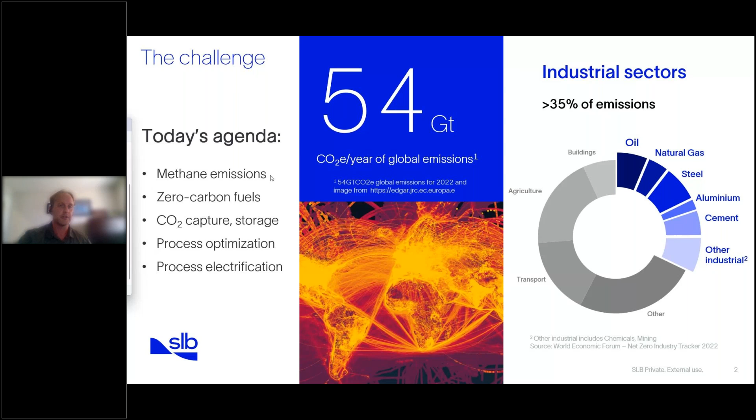Now, when we're thinking about building up the resources, building up the understanding, Eco Canada is one of the many public places that we'd see presentations such as the one I'm doing here today. But the bottom of the screen also shows a website link to efforts put together by IOGP. And similar in nature to the topics on the last slide, we can see here discussions on methane emission management within this website, reducing flaring, venting, and fugitives, energy operating efficiencies. And for each of these topics, there's guidelines, guidance, best practices, data sheets.

And we should take advantage of the public knowledge from these expert groups that are available to us today. At the same time, from this website, I like this waterfall plot showing the overall original emissions that we might be thinking about when we start our journey. From that point, the methane near zero, minimizing flaring, maximizing the process efficiencies and operational considerations. These are foundational improvements that can start the emission reductions.

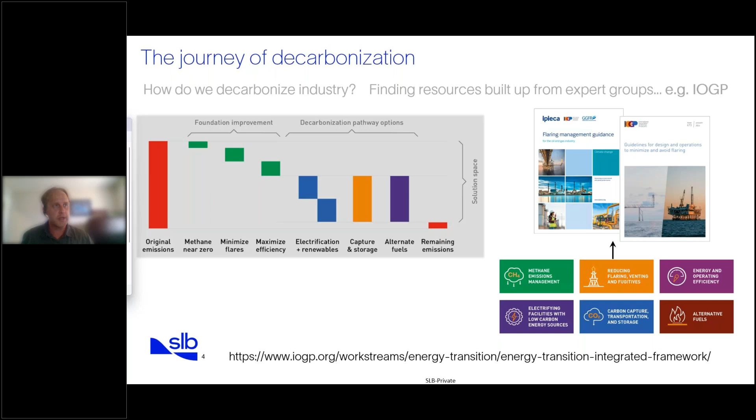Right, so really appreciate the voting there today. And again, I like seeing that process efficiency optimization, and we will be wrapping up today's conversation with those two topics, hopefully bringing in some considerations that maybe you haven't seen before, maybe some that can just reinforce what you're doing today.

So when it comes to those different topics of decarbonization, when we look at the company that I'm coming from, SLB, formerly Schlumberger, and we look at the global decarbonization projects that we've been involved with over the last couple of years and throughout our history, one of the things that we can definitely tell, above the fact that there's a lot of different activities occurring, is that there is a larger contribution from specific types of decarbonization depending on the region globally. So in the North American market, we can see there's a lot of carbon capture, utilization, sequestration. In other areas, we can see the low carbon solutions are pushing through emission reduction type projects.

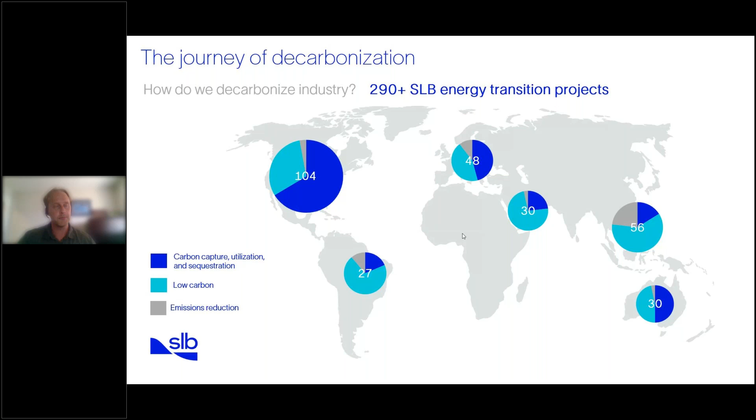And what really I wanted to say to this talking point is that different global regions have different benefits from looking at different decarbonization solutions. So you can't give that overall blanket of a silver bullet when it comes to what you should do behind decarbonization. But here in Canada, of course, we do have some natural resources, some geology, the different types of labor costs, the utility availability and stuff that will all lead towards what might work better in our region versus others.

So the first topic I want to touch on today was actually one that was shown of least interest to the crowd. So maybe this is a good conversation to bring up and bring awareness towards, which is the methane emissions. So when we think about methane emissions and how much that contributes to the overall CO2 equivalent, we can see here one of the plots pulled from a couple of years ago where we can see the direct scope 1 contributions of just methane towards the overall carbon dioxide footprint.

Scope 1, just as a definition, is the direct process emissions. Whenever we're talking Scope 2 within this presentation, that's looking at the utilities such as power consumption that's related to the emissions. And then Scope 3 is a much harder to measure and calculate emission footprint, which is the emissions brought through the suppliers or the generation of the materials required for the solutions.

So one of the things right here in this upper pie graph is we can see the methane contribution towards the overall CO2 equivalent footprint is very large. When we break that down further, we can see that at least for onshore methane emission sources, there's the cities, pipelines and stations, gas plants, there's the gathering and boosting stations, as well as the well pads. There's a lot of different sources of the methane, and they come in different types of causes, where it's fugitive, it's planned, safety, blowdowns, etc.

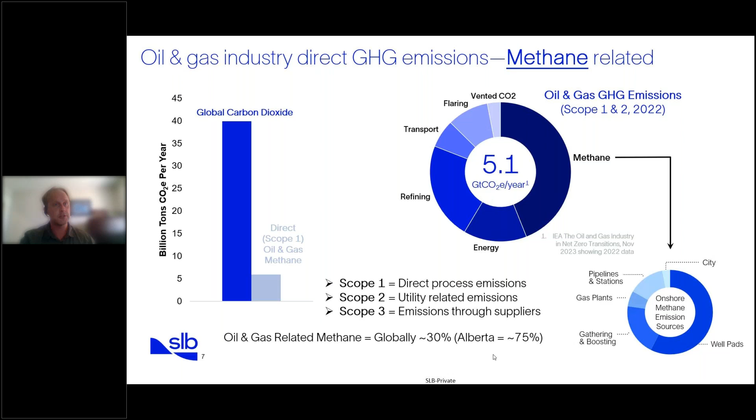And one of the things I also wanted to mention in this opening slide for methane is that oil and gas specifically, so not talking about agriculture, landfill type emissions, but we're talking about the oil and gas sector. Globally, it's typically considered around 30%. When it comes to Alberta, though, because of the large activity in the oil and gas sector, there are some numbers that push it as far as 75% of the methane is coming from the oil and gas sector. So again, it shows a good opportunity to reduce and even make some monetization along the way.

So thinking about what are we doing here in Canada? What are we doing in Alberta in a region with more activity? This is just some of the things that I collected very easily. So one of the things that I'd mention right away is that there's a lot of different pressures trying to minimize or abate methane within the industry. So we have the corporate commitments, so the companies that are choosing to become low emission type organizations. We have the investor pressure, of course, coming through, loss prevention, so literally just not wanting to lose that natural gas that could be brought to the market for sales.

We have certified gas that's coming up more and more around the world globally. And we have the non-government organizations, which do the name and shame these days. They say, look how much you're flaring, look how much you're emitting, and they try and put pressure on the companies. And of course, there's government regulations. When it comes to directives, such as Directive 60, kind of summarized here, we're looking at, can we actually eliminate the flares? Can we eliminate the vents? And we also see ramping up the global pressure. There's already 38 stock exchanges with ESG as a listing rule.

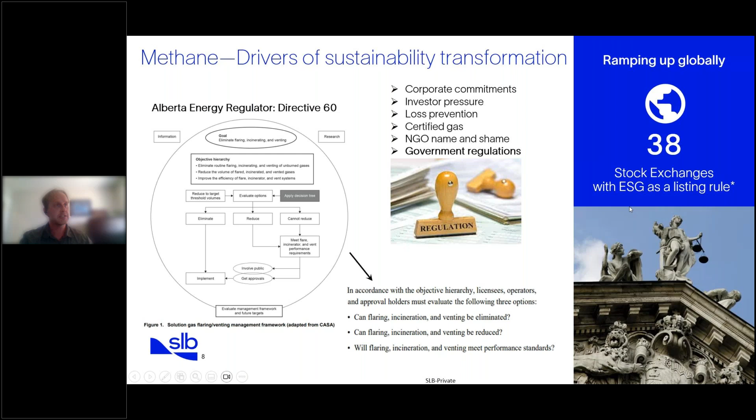On top of that, we also are looking at sustainability reporting standards. So there's one scheduled at the beginning of 2025. It's currently voluntary, but Canadian regulators are deciding if it will become mandatory. At the same time, there's proposed regulatory framework to try and achieve some of the goals of oil and gas methane specific emissions by 2030.

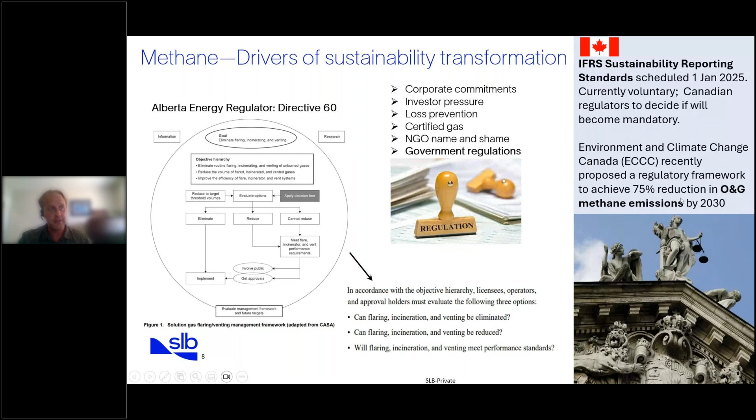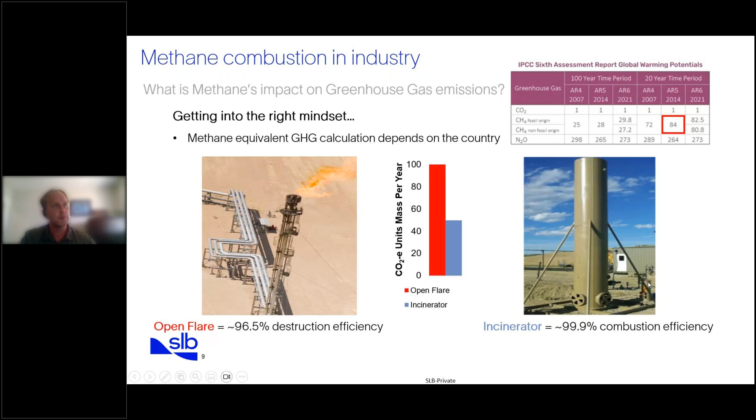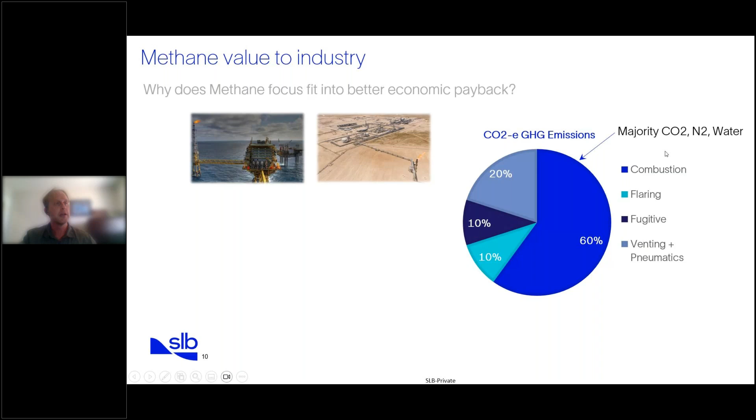With that mindset, we also want to say why focus on methane, especially at the beginning of the decarbonization journey many companies are doing. One reason is when we look at the CO2 equivalent GHG emissions in the upstream, we see a typical asset will change depending on location and equipment, but usually there's a large contribution from combustion type equipment. There's also flaring, fugitive emissions, venting and pneumatics. In the case of combustion, once you've created power or absorbed heating sources of energy, you're mostly looking at a mixture of CO2, nitrogen, and water.

But venting and flaring may be more difficult to collect with fugitives. We do have a majority of methane or hydrocarbon content fluid in this case, which can point towards good techno-economic opportunities. This could be found through gas recovery into the sales lines, gas recovery back into the feed or the suction of a compressor pump back to the front end of a facility where it can be processed into sales material, and it could also be converted into product value such as heating, power, or chemicals.

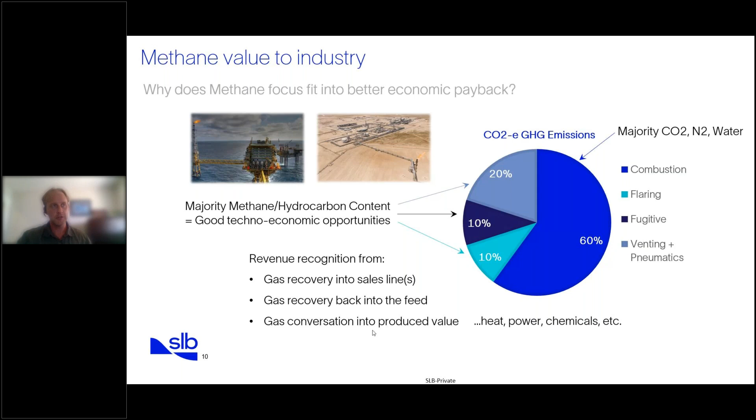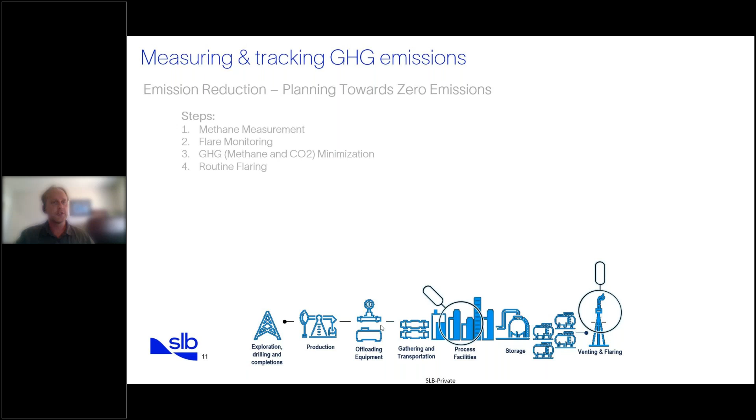When we think of the journey of measuring and tracking GHG emissions specific to methane, there are specific steps we usually recommend. For zero emissions, first you should have a good measurement program. This would include top-down measurements such as satellites, drones, and planes, as well as closer point sensors like OGI cameras you might find on the ground. We also have flare monitoring—how much hydrocarbon slip, what destruction or combustion efficiency, and what volumes you're seeing from each flaring point.

Those all collected together point towards voluntary programs like OGMP, which look at tracking those types of emissions. That's a good starting point to understand what you're dealing with before moving to the third step, minimization. From the audience polling results today, we can see this minimization or optimization of your process and facilities to reduce emissions is a step you should do before going into extra activities like monetization of the resulting emissions from vents or flares.

So if you start by looking at how to monetize vented or flared gas, finding, sizing, and deploying solutions in the field, and only then go to minimizing and optimizing emissions from your facilities, you're going to find that you've over-designed those solutions. This is typically the progression you want to follow.

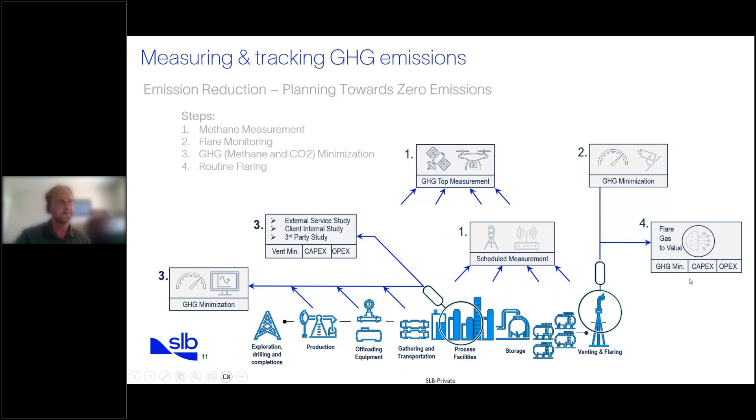Ejectors and eductors are mostly stationary units. What they do is use a motive fluid, whether gas or liquid, at a higher pressure, and it creates suction as it passes through the unit, drawing in the gas to be recovered, boosting its pressure, and pushing it further along within the facility or to a point of value or market.

When we think of these types of systems, one thing we should consider is that they have to be fail-safe. In other words, when these systems go down, as they might and they would, we still need to make sure we're properly combusting those fluids and not just venting them to the atmosphere, going back to the emission impact of not combusting things properly.

You also want to make sure when you're going through these recovery systems that you do that third step before the fourth, which is optimizing the facility process operations itself. One example would be reducing the oscillatory behavior in your plant as much as possible.

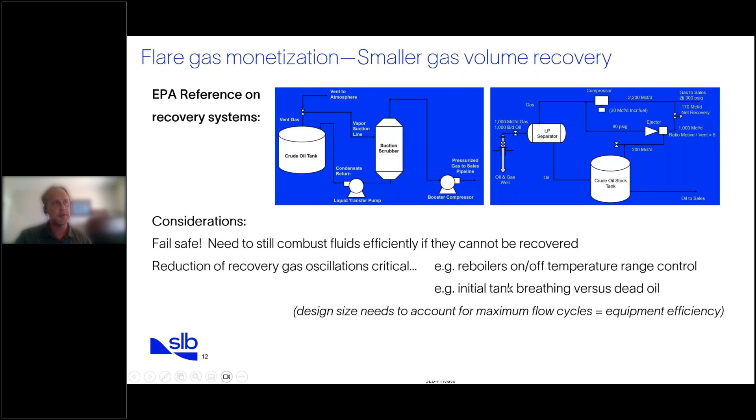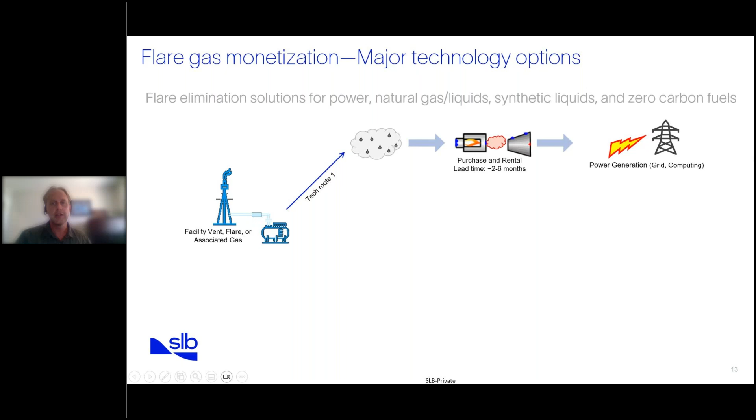When you get to larger solutions and you start looking at a quarter or half million standard cubic feet per day type situations, you do have different options, not only of what you're going to bring as value to the market or to yourselves in your own operation, but also to the different lead times and business opportunities.

So in this case, we can look at power generation. A lot of companies I've talked to globally say power is king. If you're otherwise wasting the flared or vented gas, why not run it through a purchased or rental type solution, generate power at site, potentially even bringing it to the grid, even though there are challenges depending on the size of the project. Typically we're looking at lead times of a couple of months to half a year.

When we're looking at a second technology route, mainly purchasing equipment that can compress or liquefy the otherwise flared or vented gas, dropping out condensates as well, or the LPG, we can then ship that to a point of use, utilization, or sales to the market. These types of equipment usually have lead times of half a year to a year, and again you're typically going away from the rental or lease options and going towards purchase.

The third technology route that we're looking at is potentially converting it to a synthetic liquid, such as synthetic crude, gasoline, diesel, or even synthetic methanol. These technologies are not as mature as the first two, but there are facilities and technology companies that have been running for years now across the world. They have thousands, tens of thousands of hours of operation, and very solid design specs at micro levels.

Unfortunately though, when we're getting to this size, the lead times can easily be 1 to 2 years. The reason I'm mentioning the lead times is when we think of 1 or 2 years of lead time for one solution, we're thinking of where we are here today towards the second half of 2024, and we're thinking of the goals of 2030. We can now start seeing that lead times and the scale up that we require might be an important part of when we need to start some of these efforts.

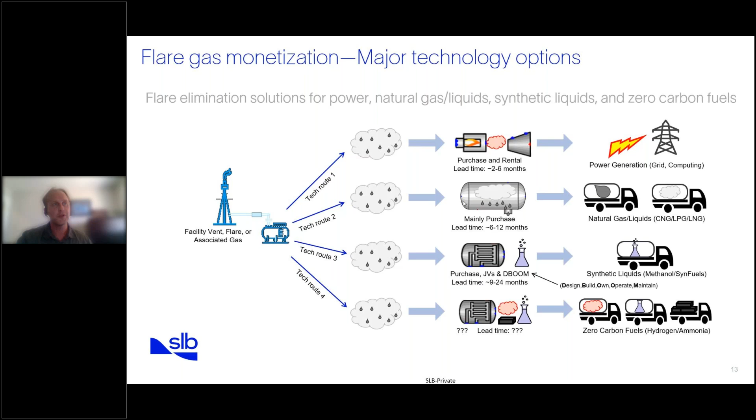Moving into the market space these days, we also see computing type solutions, and some of these top solutions also going into gas purchase agreements. Some companies will come in and make an agreement where they will purchase your otherwise flared associated gas off of you. And then they will take not only the gas, but they will also take your emission footprint. But of course, they're also going to take the value to market that they create. So again, a lot of flexibility in these things.

But one of the things that we do internally as a company, that we always recommend to any company that's moving into this space, is that you build a rigorous thermodynamic validation of the different solutions.

The vendors, the technology providers, will always say their solution is excellent for what you need today. A lot of companies actually come to us and say they don't know which one to pick, specifically because their flare or venting opportunities, the volumes, compositions, and delivery pressure will all make an impact on the techno-economics of these types of solutions.

So internally, if we pick one of these types of solutions, say liquid fuels through a conversion technology, we will actually build out the technology solution within a thermodynamic environment. We make sure that it's modeled to multiple points of feed composition, and then we'll have a better understanding of the emission reduction footprint.

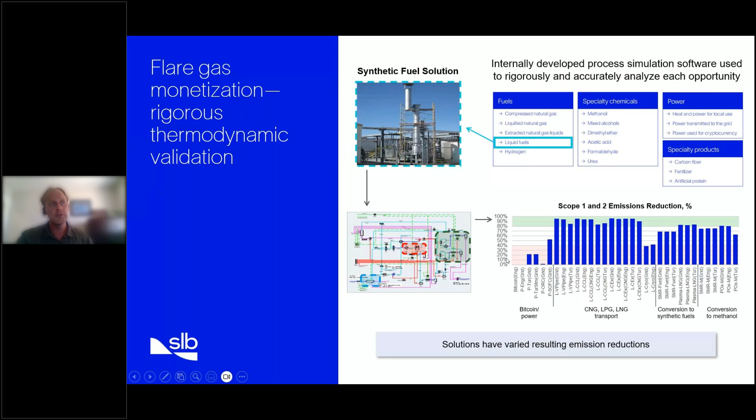Unfortunately, a lot of computing and power generation uses what would have otherwise been wasted, flared, or vented gases for emissions. But in the total holistic story, you're still not reducing emissions. You're still putting the CO2 into your field.

Some of the other solutions, you might say, well if you create synthetic fuels or synthetic methanol, you're going to burn it anyway. It's not always the case. For synthetic methanol, as an example, you might use it as an antifreeze or an inhibitor, especially up in Canada in the northern regions where things might get cold.

You could ask yourself, how much are you paying for methanol today? And this would be higher grade methanol from the market. Can you offset that cost by creating synthetic methanol in your field today? So you're even removing the inventory costs.

At the same time, some of the synthetic fuel liquids can go to lubricants because they're very paraffinic in nature, which comes naturally from the synthetic process and the catalysts. It might also be used as feedstock in steam cracking plants, creating ethylene, and then downstream to vinyl chloride monomer type plants, being turned into recyclable plastic.

So again, some of these solutions are leading towards non-combustive and non-emission creating results, and those are things you might want to be aware of.

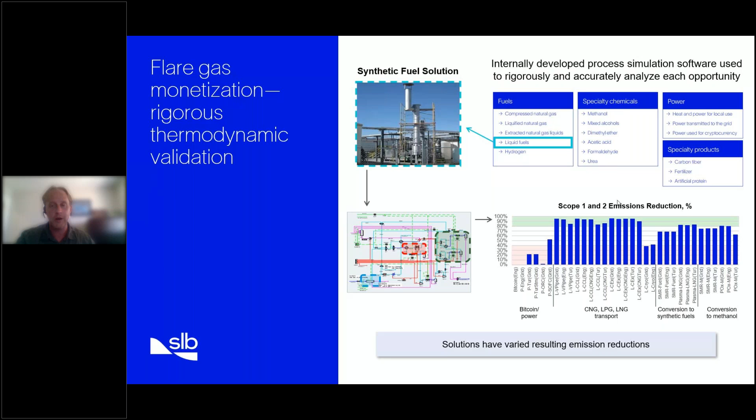The other thing we want to think about, not only with these types of solutions but also some of the carbon capture micro solutions I'll talk about soon, is that micro scale brings different economic considerations. The equipment, as it gets smaller, does not typically scale well with economics. So you're going to be paying more per unit of production or feed gas coming in. You also have the disadvantage that instrumentation and control systems don't scale down in cost as well as everything else.

So you have to take into consideration that some of these solutions have a minimum volume where economics make sense. You also have to make sure each technology doesn't come with an unreasonable utility consideration, whether that's logistics, safety, or cost. So if something needs a lot of power generation, and that power generation is created by something emission heavy, that probably won't be a good solution.

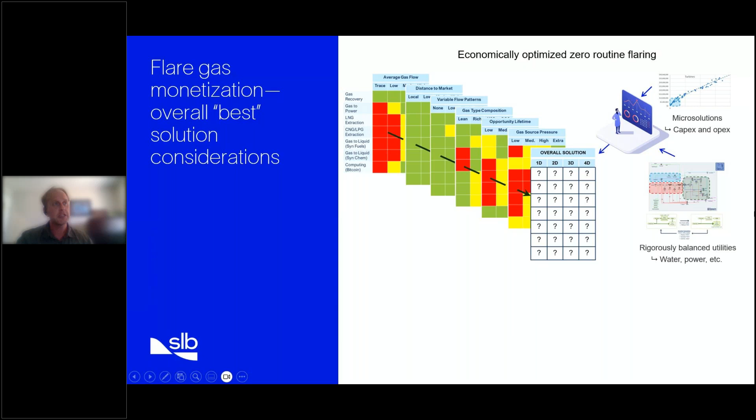If you need a lot of potable water in an area that is water restrictive, again, probably not the best solution. But these rigorous models and studies that we complete internally help us make sure we're not picking the wrong solution, and more to the point, that with a holistic integrated solution where we might generate our own power, clean our own water, or remove potentially harmful content in the front end through treatment, we find what we'd consider the diamond in the rough.

Is there one particular technology that can go through the average gas flows, the distance to market, the variable flow patterns of the source gas, and even the delivery source pressure, etc.—go through all the parameters that might impact the overall economics and find the solutions best to move forward?

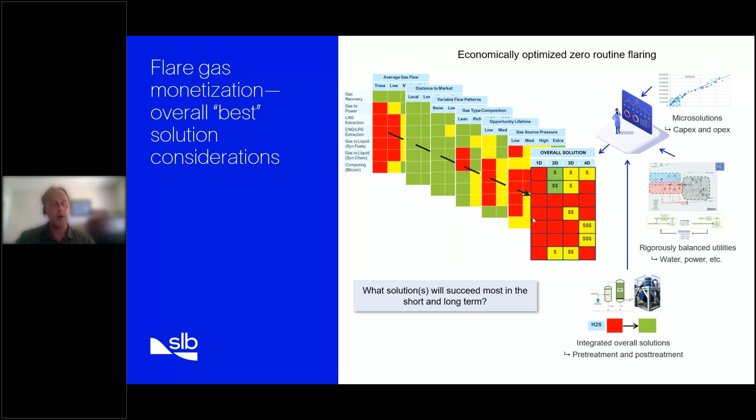And this is not just in the short term, but we're also looking at long-term solutions. Some of these will probably become more apparent as we talk about the electrification side of things later on.

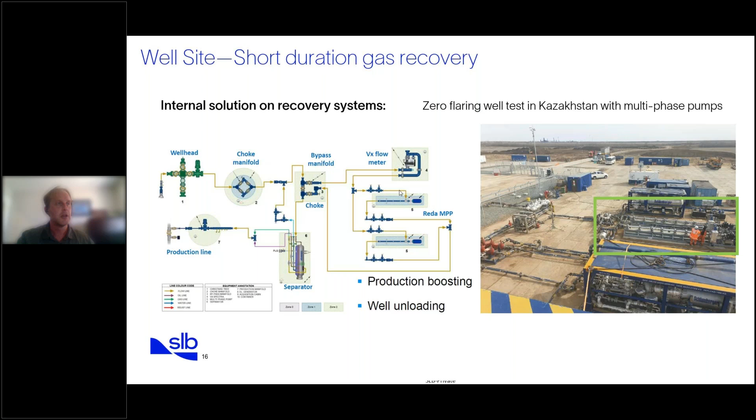Within cleanups or some of the well testing considerations.

The other thing I wanted to mention is that within our company, we are now looking at always using low emission valves, and of course we're also selling this to industry. About 95% of our valve portfolio is covered with low emission valves. This is not always as easily done on brownfield applications, but for greenfield applications, we're always making sure these are the valves we try to implement.

Of course, you want to make sure they're also okay in applications of new fuels that are coming through. We also want to make sure all of these are good for aftermarket services and repairs at low cost.

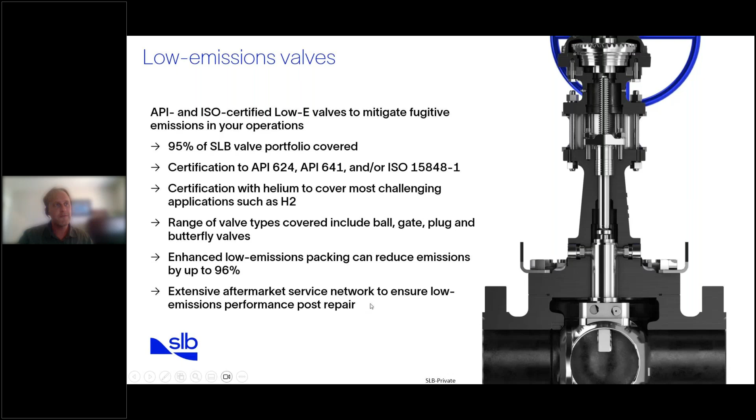But when we think about low emission valves and where they fit into the emission space, we can think about pneumatic control considerations overall. High bleed pneumatic controllers — we can look at how much emission impact they have versus low bleed or no bleed type considerations. There's already a magnitude of impact with this consideration, but we can take it one step further and also look at air compression considerations.

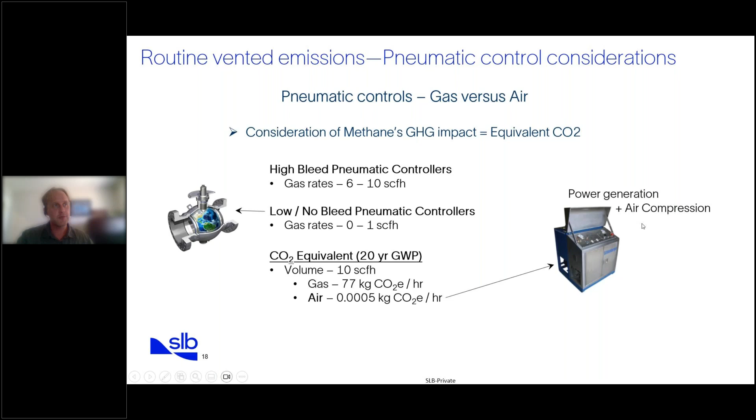One of the things we've also looked at with decarbonization is whether we can use some of the otherwise pneumatic vented gas. We can use it to combust for energy, compress air, and run air through the system instead of just venting it. In those situations, power generation and how that's done becomes extremely important.

One thing I'd like to mention is that a lot of the good solutions we've found in industry globally use something like a Stirling engine. Stirling engines are very robust and have good lasting power. A lot of times I've heard stories of hurricanes going through the US.

When they're looking at power sources that are still showing up on the grid, there are a couple of locations running the pneumatic controls in facilities in the oil and gas industry, and they are using those Stirling engine air compressor solutions. So again, these are some of the considerations to go from the older higher bleed valves, to low or no bleed valves, and then to air compression.

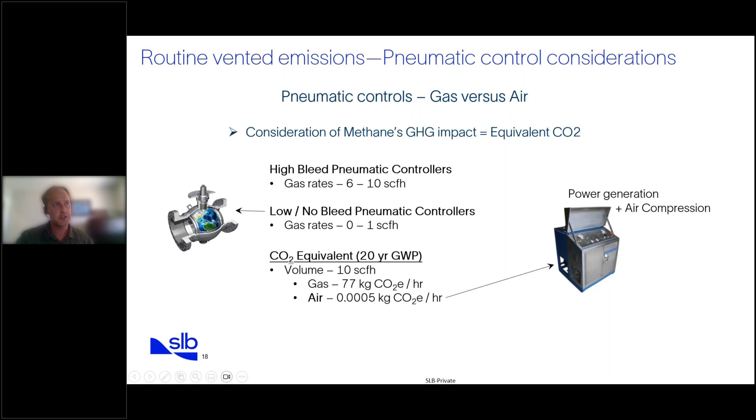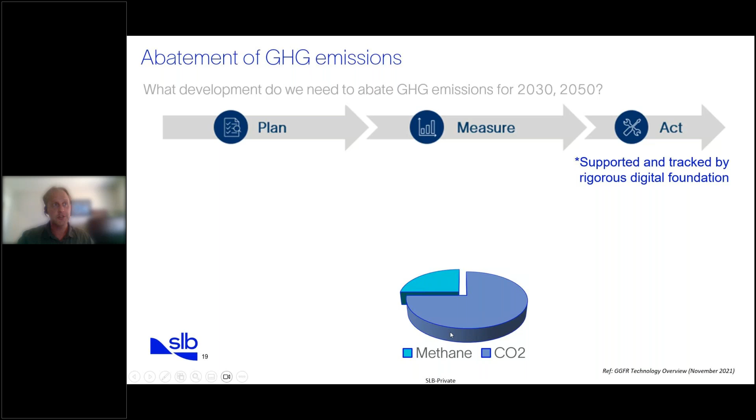Taking a step back now that I'm done with the methane section, we want to think about how we're going to abate those GHG emissions for the 2030 and 2050 goals. We're planning, measuring, acting on those solutions and the data we've gathered, and supporting and tracking it through a rigorous digital foundation to make sure we're doing things well. But when we think about overall GHG emissions, we have our piece of the puzzle that's methane, but a very large piece that's CO2.

For methane, I've gone through some of those solutions, but now I'd like to shift focus and go to what we can look at for CO2 related to post-combustion capture, direct air capture, or even zero carbon fuels. But before I go to the next section, I'd like to bring up a second polling question.

I loved the activity and enthusiasm on the first polling, so I hope you all have the same for this one. It's about finding a balance between production increase and a commitment to climate change. We all know this is critical, but what would be the top choice on where you are today? Would it be monetizing all your product and getting that revenue stream? Just worried about eliminating emissions, whether that has cost or not? Or do you want to look at both — reduce emissions but make sure you're making money at the same time, so it can compete internally against more production type situations?

So far with the results, I love what I'm seeing. I've seen this poll taken in many different areas of the world. Being here in Calgary myself, and being Calgary based and Canadian based, I'm really happy to see that everything is either just eliminating your emissions, or eliminating your emissions with the awareness of trying to make sure it makes sense from an economic point of view.

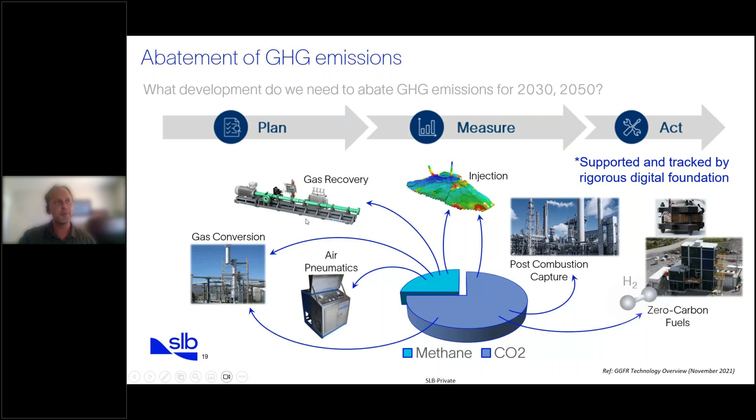These next topics are a little bit more challenging. So when it comes to zero carbon fuels, one of the things that I keep mentioning is the location.

When it comes to blue hydrogen, we can imagine that cheap natural gas as a feedstock is one of the important factors behind having the right economics. One other thing I can mention is that around this area, we also have good underground subsurface storage opportunities. So those two put together—knowing that blue hydrogen comes with CO2 storage or utilization, but then the green hydrogen side of things with electrification or electrolysis stacks—we also have an opportunity of low renewable prices in our area. So both of these can make sense.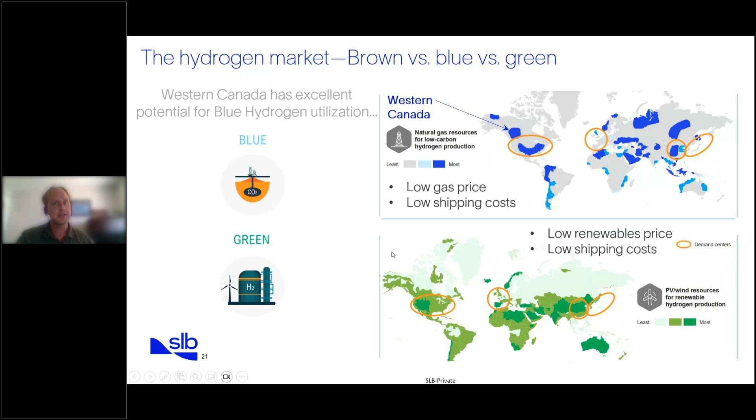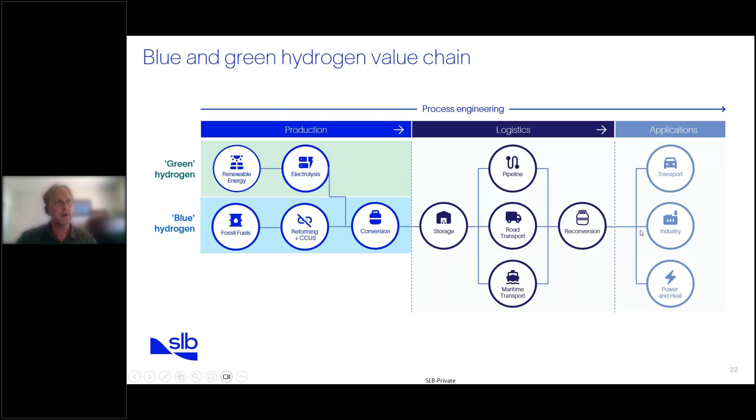One example I'll show on that. With this storyline, one of the things we want to do internally is something very similar to what we did with the methane story. We want to start with accurate thermodynamics, go into a flexible workspace where we understand reactive and separation units. We also want to make sure we see the economic impacts, especially with the major equipment we're going to be looking at, and of course the metallurgy.

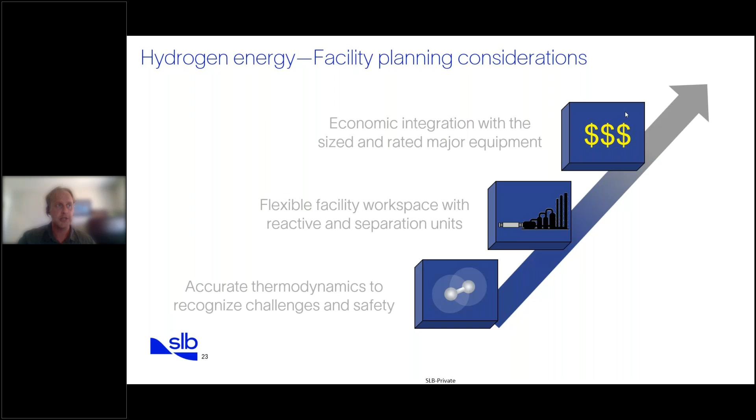Hydrogen brings different metallurgical considerations. With hydrogen-induced cracking, we want to make sure the metallurgy is well done and the associated costs are considered. But as an example of looking at the thermodynamics and the type of equipment or process involved, we can think about natural gas reforming or electrolysis to hydrogen.

We're going to compress it, store it, and dispense it to hydrogen vehicles on the road. So one of the things we can ask is how much cooling is needed in the dynamic depressurization. Another question is what natural gas city infrastructure can be used with hydrogen, or reused.

But when we think about the overall process side of things, we also want to make sure we can handle the peak rates. So when handling peak rates, we can think of the storage capacity, how many dispensers or stations we need within certain regions of population, and then the thermodynamics kick in.

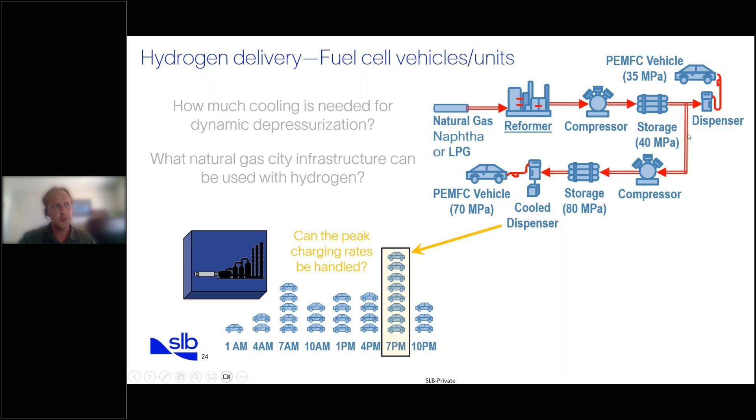I don't want to go through too much thermodynamics given the time limitation today, but one thing I do want to mention is that hydrogen is known to have an inverse Joule-Thomson effect. For natural gas, when you drop the pressure at high temperatures, you get a cooling effect. Hydrogen does the opposite—it'll actually increase in temperature.

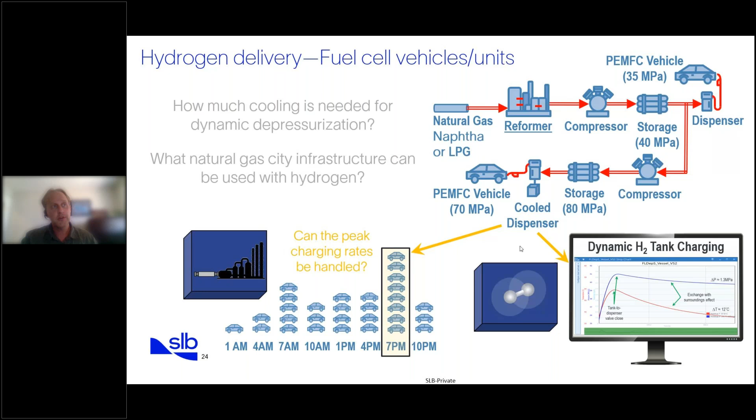Knowing these unique thermodynamic considerations of hydrogen, you now have to look at how much cooling you need depending on the speed of dispensing, and also how much pressure drop you're bringing through the system. These are the types of things that rigorous thermodynamics will help you understand—what those solutions will look like, different from what we're used to on the natural gas or hydrocarbon side of things.

When we think about the overall economics, we need to now go through different scenarios.

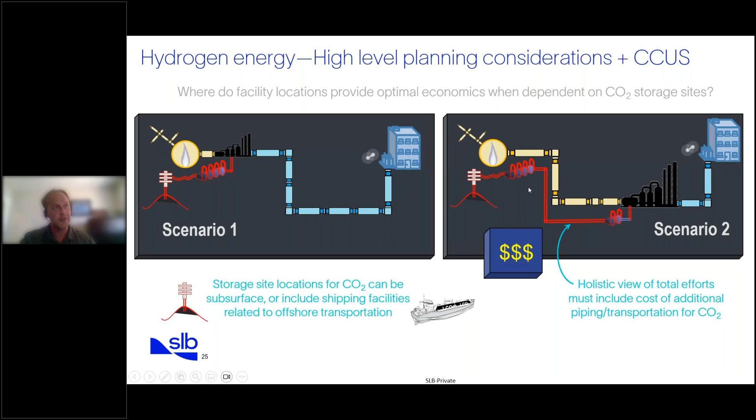Do we want a scenario where we have storage sites for CO2 that are very close to the hydrogen production and therefore also the CO2 production? Can we include the shipping facilities, the location and subsurface where it's going to be stored close by? And we can compare that to doing something where the hydrogen is going to be produced close to the site of utilization, and the CO2 is the one that's going to be taking the long trip back to where it's going to be stored or utilized itself.

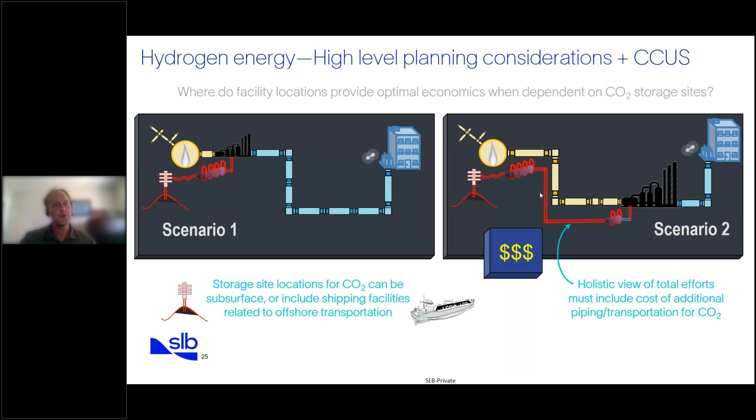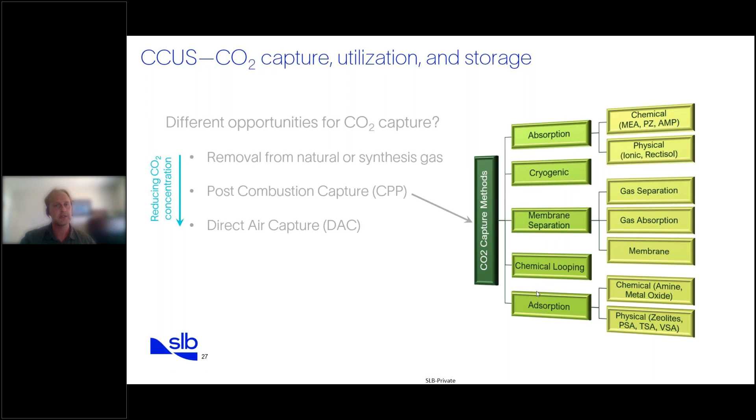I just want to pick on some of the more focal points that I found through my journeys, one of them being the composition. Of course, you also have to consider where you're going to use this CO2 and whether it's being used for the beverage or food, and you need stain removal, odor removal type applications as well within your process, or you're going for the medical and industrial, or you're just going for storage underground, or maybe secondary or tertiary recovery situations in a reservoir. All of it requires different purity. That purity can be done by the different solutions, some of them mentioned here, and this is now looking at where CO2 concentration in the initial gas starts playing better with the process considerations and logistics of different technologies.

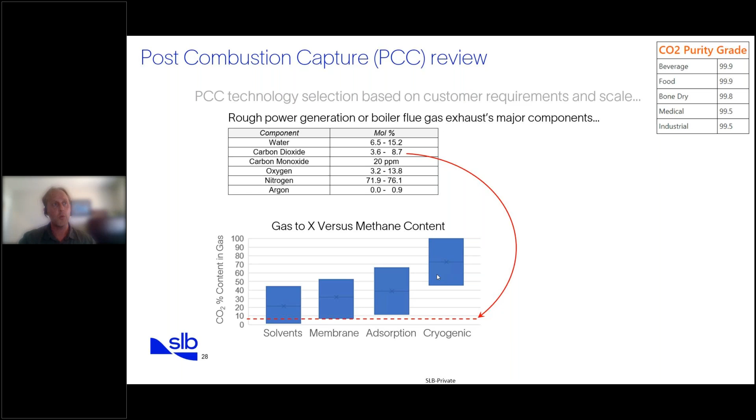So a lot of times I've talked to companies that say, hey, we have a boiler, we're looking at 3 to 8% CO2 composition. Could we start looking at cryogenic situations? Yes, you can, but probably you don't want to. And maybe what you need to consider is membrane separation or solvent separation, maybe not to get to your final composition that you need for your utilization or your storage, but maybe to get you partway there, where then that process starts making sense.

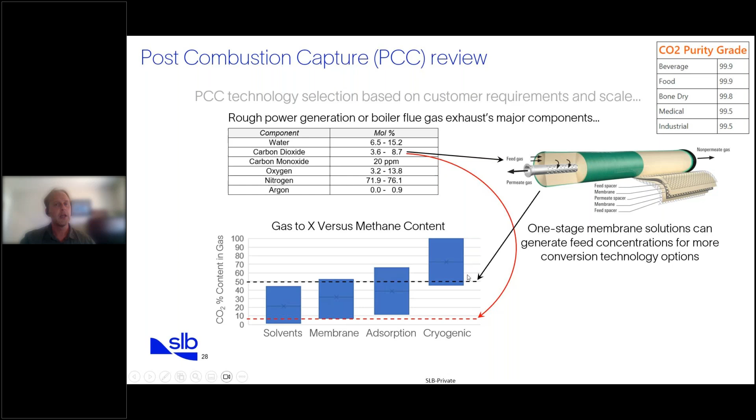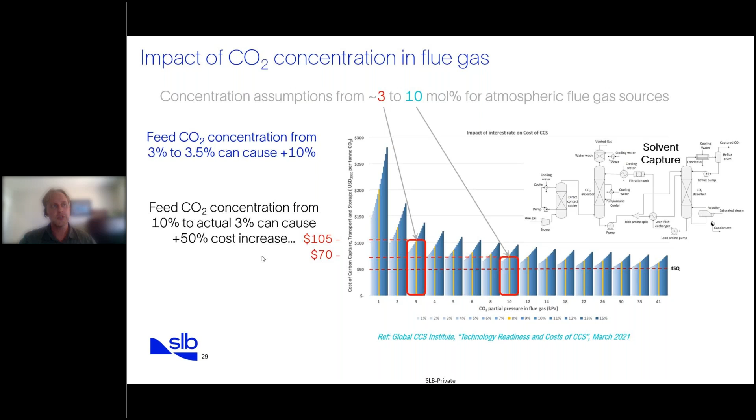So the CO2, if you can just boost it just from leaning out the oxidant going into a burner system from 3 to 3.5%, you can actually reduce the economics of your carbon capture solution by 10%. Going from 3 to 10%, maybe it's a different type of combustion system that you require. That's maybe $500,000, but it can save up to 50% of the combustion capture cost. Maybe that's double that price. So a lot of the considerations are always what type of sources and partial pressure of CO2 are you starting with?

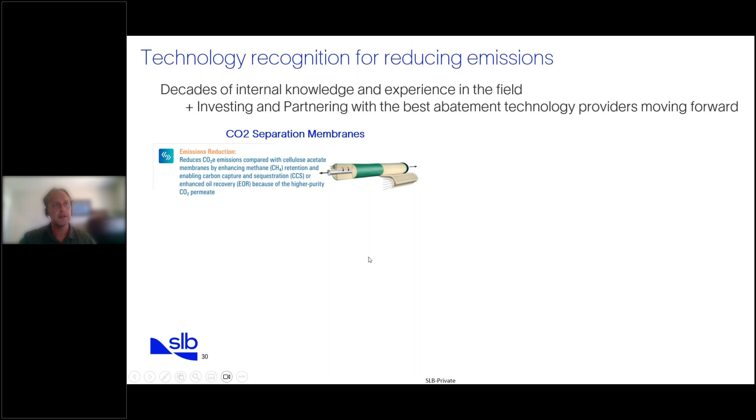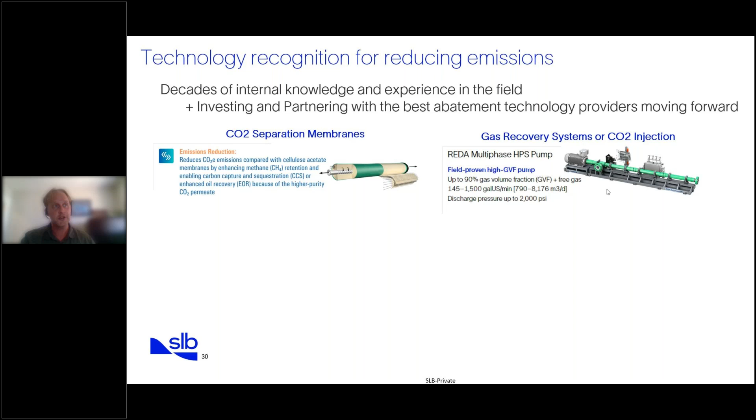When we're looking at what solutions we've adapted within our company, our partnerships, our investments, I just wanted to mention a couple of them here today, just to make the awareness of what's out there maturity-wise in industry. So we have the membranes that we were talking about earlier. We also have multi-phase pumps that can be used. I was mentioning before for the methane or the hydrocarbons, pushing them away from flaring, but it can also be used for CO2 injection.

We have an investment in ZEG, which is a company that does hydrogen as well as a unique way of CO2 separation for storage. And also with the post-combustion capture, we've looked at non-aqueous companies, which have advantages specific to the energy requirement of regeneration and also the amount of pressure you can get as the CO2 releases out of the system for then taking away from the post-compression requirements. So these are just some of the mentions on what we are looking at investing in and moving towards decarbonization.

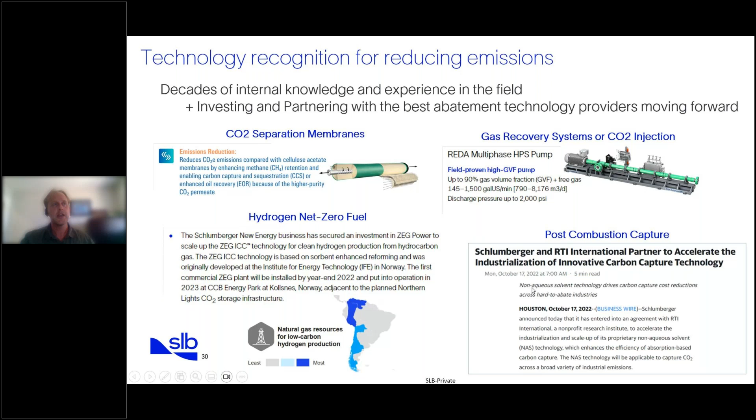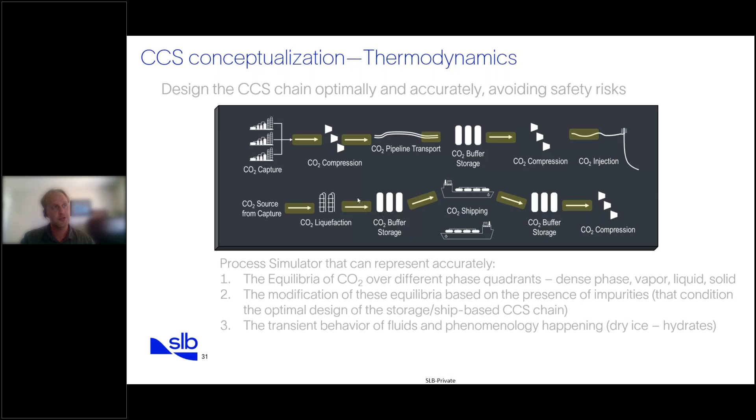I'm going to move pretty quickly here just for the means of time, but what I wanted to talk about with CCS or the CO2 side: thermodynamics, just like the hydrogen and everything else, is extremely important. Start with a good foundation, understand how small amounts of impurities change the impact on how you need to pressurize this for storage and where those boundary conditions lie.

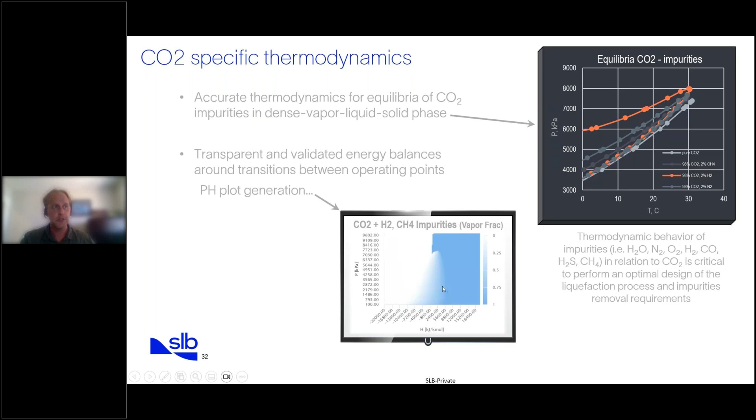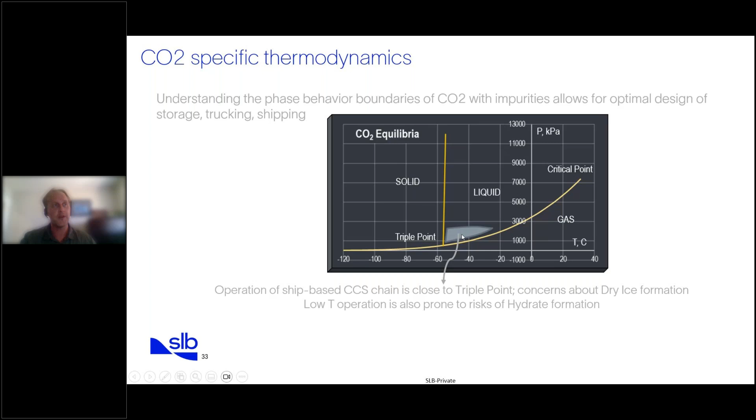Sometimes you can save a lot of money by doing a little bit of purification upstream. You don't need so much compression downstream. Understanding the energy requirements also comes from a good thermodynamic understanding, and also the storage. Where are those triple points? Where is the liquefaction? If you're going to store this and ship it, and you're going to have a specific heat loss, what do you need as a safety factor to keep it in the right phase for the transportation?

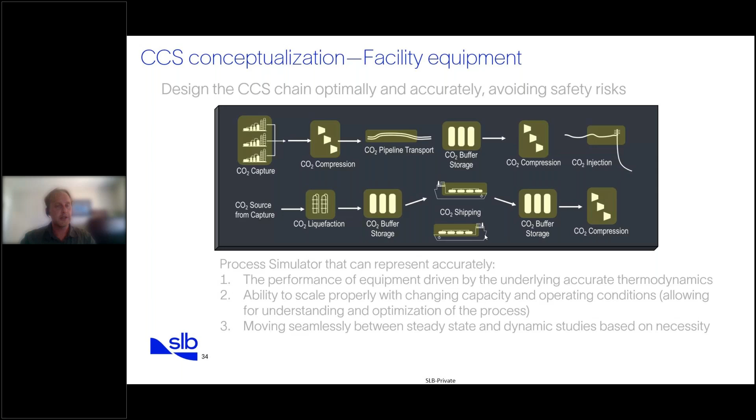At the same time, with that foundation of thermodynamics, similar to the other stories of zero carbon fuels, you're going to be looking towards transporting and using equipment to store it and separate it. This is just a couple of the mentions of work we've done. Back in 2006, we were already looking at how the thermodynamics impacted how much you can compress and how much you can interstage cool different acid gas considerations.

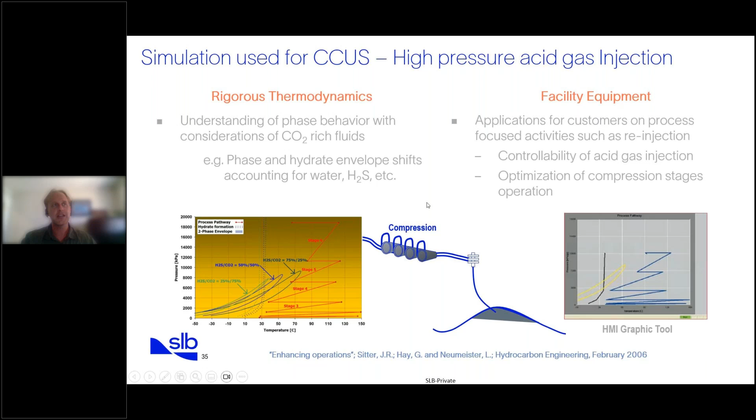And in cases of enough H2S, you can actually undersaturate the gases, removing the dehydration plant section; you can undersaturate the gases specifically. When there's too much CO2 content, it doesn't work as well, but with even mixtures or close to even mixtures for the acid gas, you can work into these types of considerations and completely remove facilities.

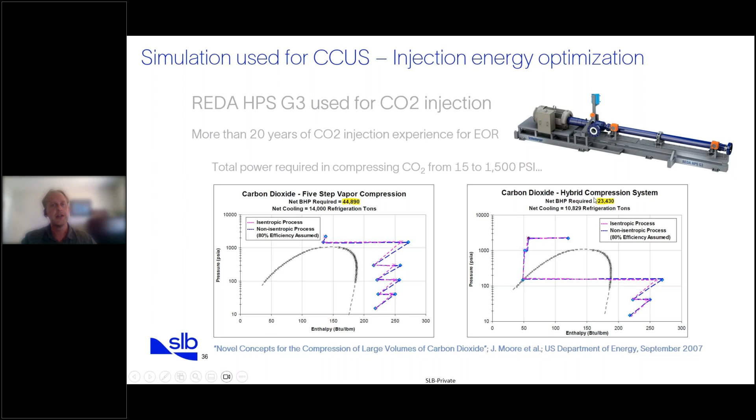There's also the idea of using the equipment along with those thermodynamic understandings to help decrease the amount of energy you need. In this case, going away from just the vapor phase compression, using multi-stage and multi-phase compression, going into the liquid side. Again, lesser volumes, compression, saving energy, saving money. These types of considerations and the references below, I just wanted to share here today.

So the last topic, which seemed to be the one that a lot of people are interested in here, process optimization and electrification. Some of the optimization is quite straightforward and simple, moving back to some of the topics we've already talked about. So multi-phase pumps: instead of doing a lot of individual wells with separation and flaring and metering at each, you can use validated three-phase metering devices, use the multiphase pumps and push these towards bulk separation where you can get larger amounts of gas and start monetizing at better scaled economics.

So again, going back to some of the slides that we were talking about before with the conversion or the LNG, CNG power generation. At the same time, you can also do some of the steps in increasing the partial pressure of CO2 in your exhaust gas to reduce the costs of your CO2 post-combustion capture. So this is almost the optimization in your process leading to some of those earlier solutions.

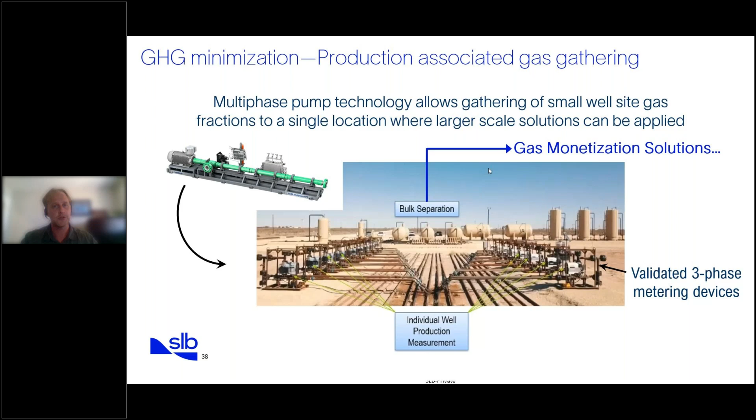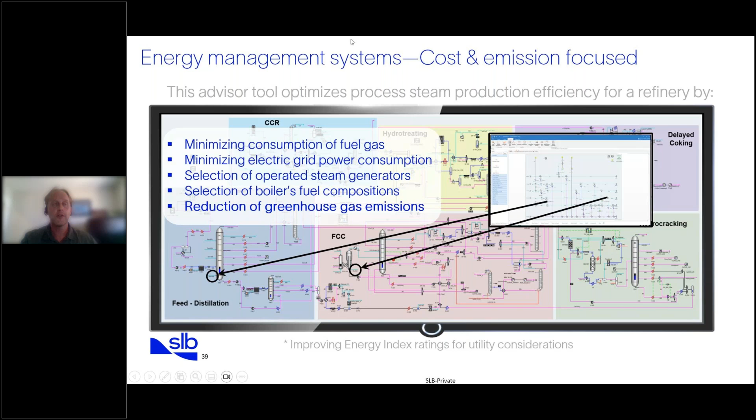At the same time, you can do energy management systems. So we can look at some of the tools that we're deploying globally, such as minimizing the utility like steam consumption within, in this case, a full-fledged refinery. We've also looked at petrochemical plants. And in these considerations, we look at all the different production of steam from the different boiler systems. A lot of times there's multiple boilers and different types of fuels for each of the boilers. So whether it's cogeneration or just steam generation, we'll look at each of the individual sources of steam.

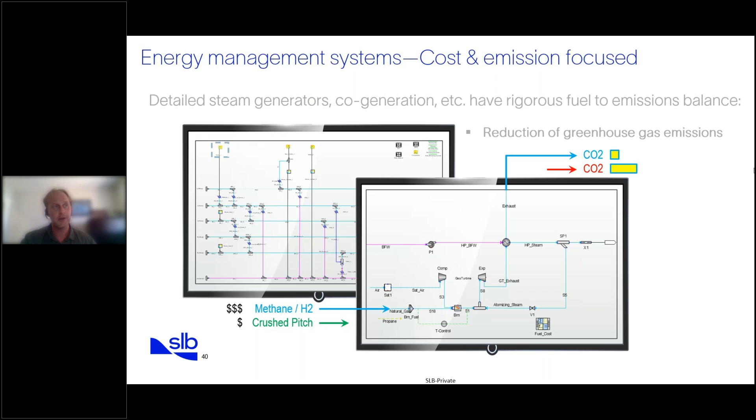We'll look at the types of different feeds and say, these are the associated costs. Methane, hydrogen might have a very high cost. Crushed pulverized pitch mixed with some water, really low cost. But now we're bringing into the weighting considerations the CO2 footprint. Which one's going to create more CO2? How can we minimize the amount of steam we're generating and wasting either way? And then how do we also optimize the feeds and the performance of each of the boiler systems?

And one of the things that we've seen with a lot of promise here in the Canadian region is for SAGD considerations, or steam assisted gravity drainage operations. It's the same idea. How do you optimize that steam going into the ground? And looking at it not from a steam volume consideration, but from an energy balance consideration on what you need in the ground.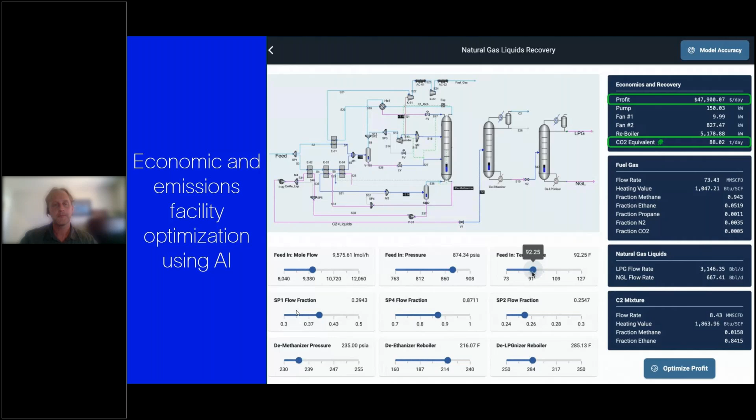When we think about some of the facilities like dehydration plants, a lot of times you might look at some of the literature and say, well, desiccant dehydration, maybe it costs more, but it has much less emission footprint than something like a glycol dehydration plant, which has the vents and the flares, the pneumatic devices. But internally in our company, we've put together ventless and flareless technology innovation, and in those cases, with all of the applications that we've put towards it with very comparable costs, we can now easily compete with the emissions that we'd be looking at from a desiccant type dehydration.

These types of solutions also, when you're looking at them, there's a lot of brownfields compared to greenfields. So it's always recommended that you look at retrofit kits. So not something that completely redesigns the process, but something that can be put on the skid, which is the technology that we've looked at, where you can retrofit to the thousands, in this case, tens of thousands of dehy facilities that right now are contributing to emissions across North America and the world.

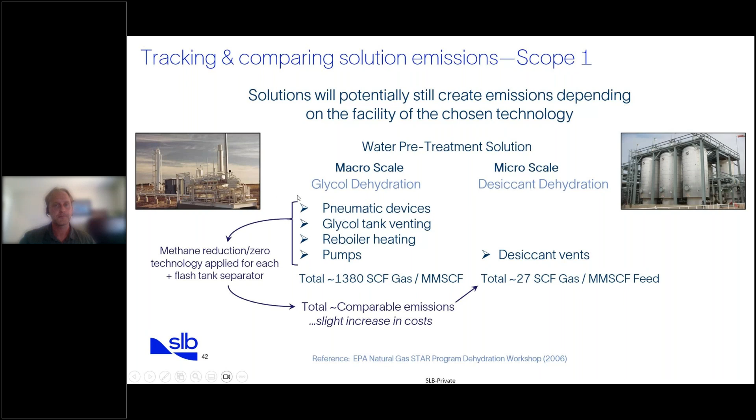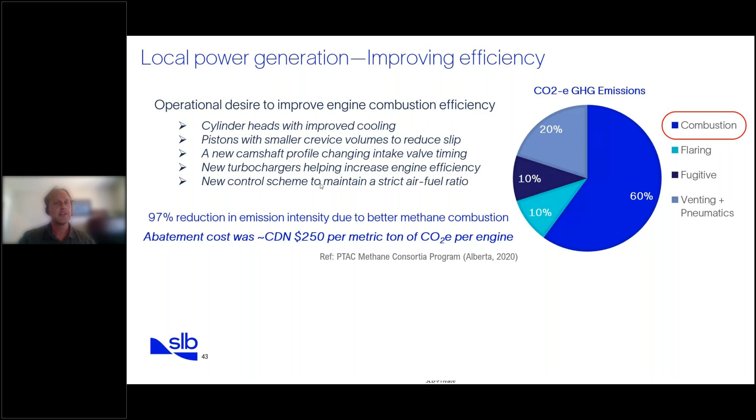I also wanted to mention power generation. With this large section of combustion and the methane slip and everything going through, there's a lot of different improvements that can be seen to reduce that methane slip. Unfortunately, it also comes at a cost. Whether it's a retrofit solution or you're doing a second generation or fifth generation, some of the engine and turbine manufacturers that I've talked to now have a lot of different technologies that allow you to reduce the emission footprint. And again, going back to that flaring, open flare versus incineration, it's looking at reducing the methane slip and just keeping it to CO2.

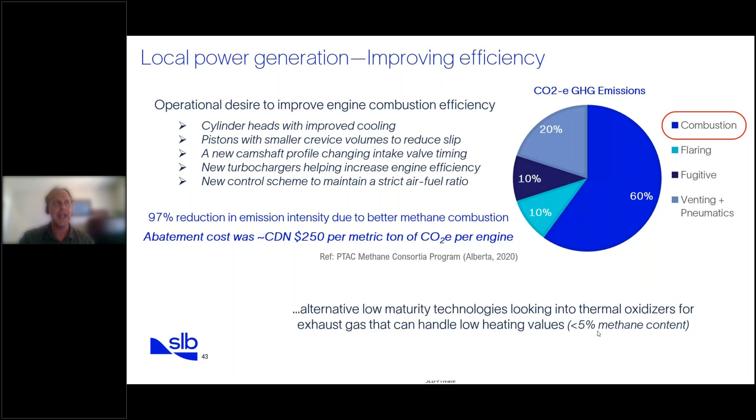Talking about new disruptive technologies, we're also looking at thermal oxidizer technology vendors that can start looking at how to combust the remaining methane slip. And of course, this is looking at extremely small BTU volumes, but the technologies are getting there and some of them are looking very exciting. And again, this is looking at the brownfields. How do you retrofit what's already out there, reducing the costs, not wanting to purchase new equipment?

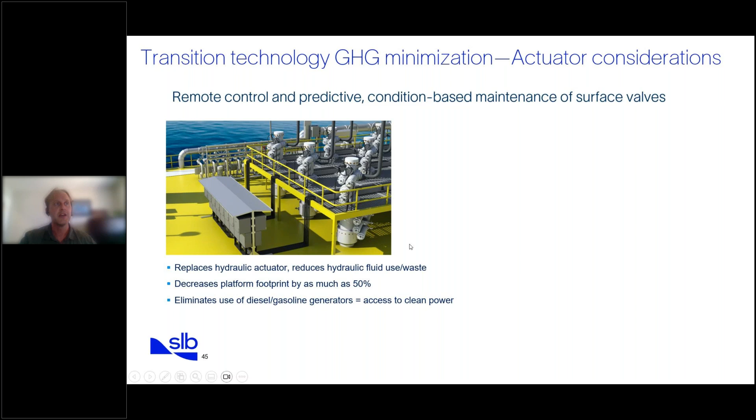And the last mention on process electrification, which I'll keep quite quick, just so we have some time for Q&A, we're looking at efforts like the actuator considerations. So we're replacing the hydraulic actuators, we're adding electrification. Some of the advantages beyond the emission reduction is we're also removing footprint. You can imagine in offshore, the footprint is very valuable. So it also allows us to free up footprint space, maybe for other flare elimination technologies. Whenever we do these, we always make sure that we look at the rigorous emission reduction, make sure that we are actually doing what we feel that we're doing, taking into account scope 1, scope 2, and when possible, scope 3.

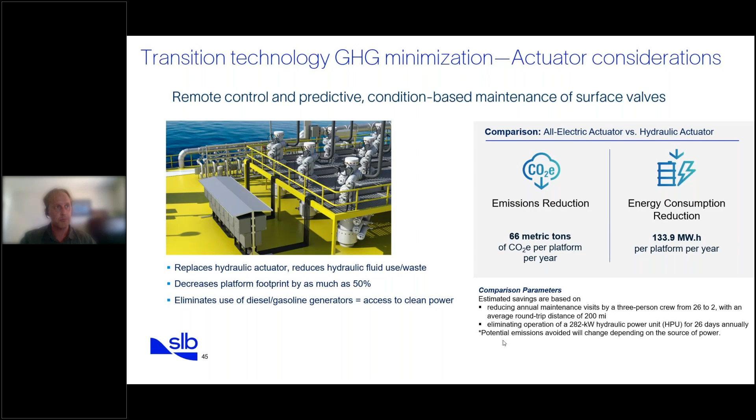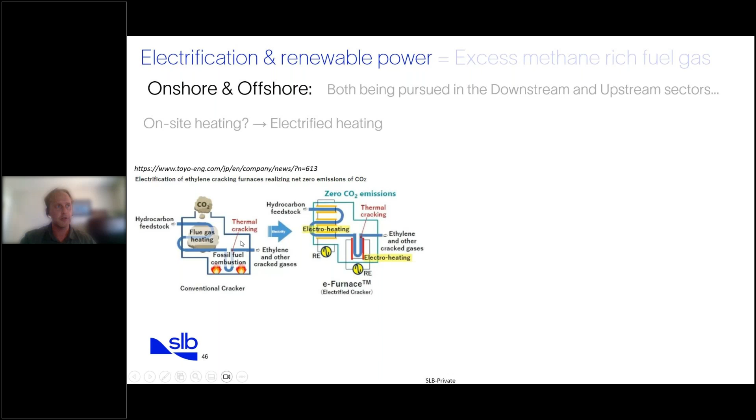With electrification, one thing I want to mention is that when we look at today's environment and industry, the cracking furnaces are moving away from typical furnace environments with burners toward electrification. We're electrifying the reboilers, electrifying the pumps, once again getting away from local combustion.

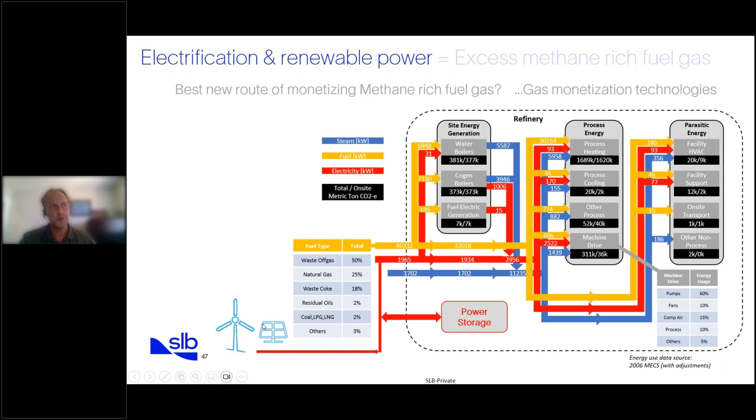In this graph of a full-blown refinery, but you can imagine any midstream or upstream facility, you bring in renewable electric sources, start electrifying, and even add power storage. At that point, potentially some of the off-gas that otherwise vented or flared, you bring in as a fuel or heating source. It's a good way of utilizing it, but you're still creating emissions.

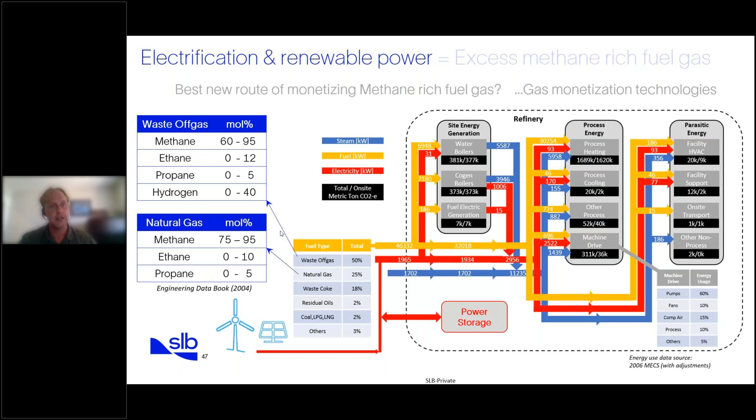When electrification comes through, those heating sources or self-power generation opportunities will basically eliminate themselves. So we still need to think of those longer-term solutions.

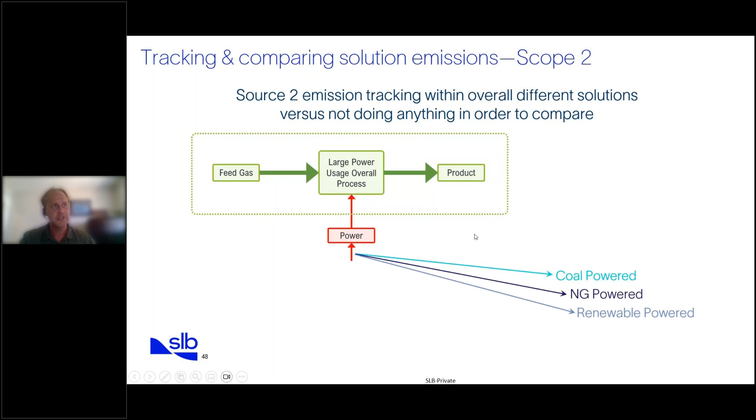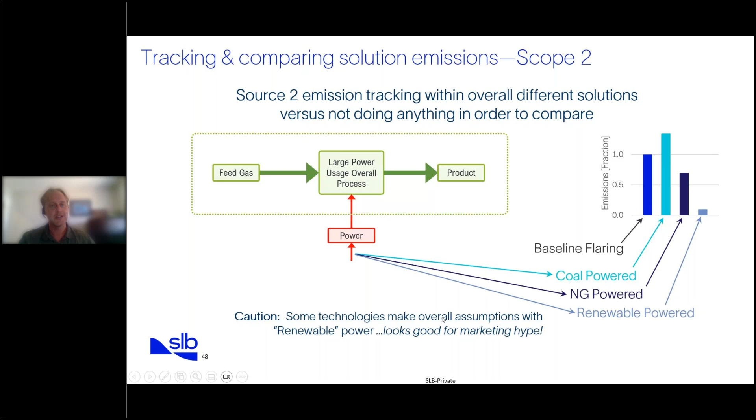One thing I'll warn about when looking at electrification of any process or power requirements: always check where the power is coming from. Is it coal powered, natural gas, renewable? Based on your baseline, you might be creating more emissions than you're saving with the technology. There's a lot of technology assumptions and renewable power assumptions made to make it look good. Watch out for the marketing hype.

It's a strategy to plan, measure, and act on the methane side of things. Remember, the measurement will allow you to recognize the achievements you've got through your actions.

Digital simulation is key. I kept talking about the thermodynamics, the modeling environments. We have to understand all the nuances and specific unique considerations of each type of process for decarbonization.

Innovation and experience from oil and gas is a valuable asset. I go to a lot of different universities - Canada, US, flown across to Japan. I always tell people coming up that oil and gas has the right fundamental knowledge and learning foundation to apply towards decarbonization. So we should be the leaders in this space due to our experience and knowledge.

It's a business strategy. It's not just services and technologies. It's a business strategy that we have to start as soon as possible and see through to when it has to be applied for the different milestones. And regulatory changes will definitely impact the speed of global action, and not only regulatory changes, but also what companies decide to bring on themselves.